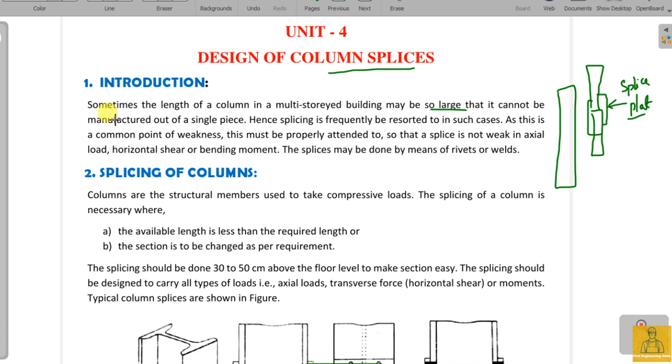The manner in which they are placed, or connecting the columns, is a little bit different compared to battens and lacing systems. Let me go into this. Let me show you a few figures here so you may get more clarity about this.

This is a column - this is the upper column, and this is the lower column, and this is nothing but the splice plate. This is how they connect, and this is the front view, this is the side view, and this is the isometric view of that section column.

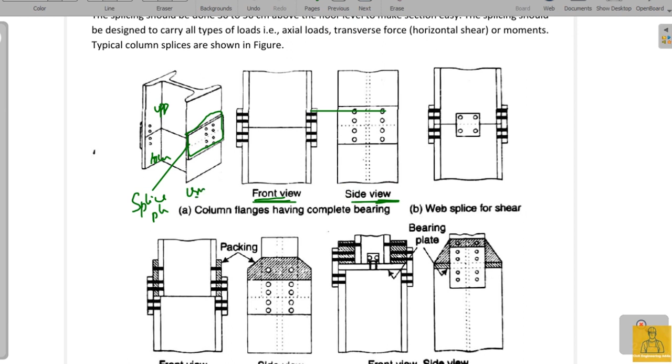Sometimes web splices to resist shear are also used. In the first case, the splice plates are attached to the flanges of the I section. But sometimes when there is shear, in order to resist the shear on the column, we use these web splices also. Web splices are meant to resist the transverse shear.

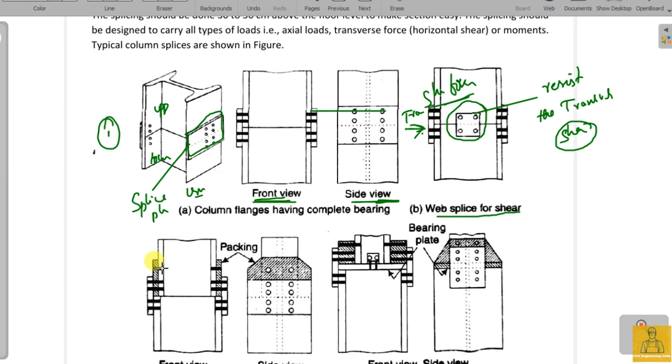In some situations, as you can see in figure C below, the upper column and lower column are of different dimensions. So what happens in that case? You may have to use a packing plate. This is a packing plate. The width of the bottom column is higher than the upper column, so what happens is you have to use some packing plates.

But in some situations, the upper column can be very much small. So what happens in that case? If you see in this fourth figure D, the upper column is actually resting on the web of the lower column, isn't it? The upper column is resting on the web of the lower column.

So in that case, what we do is we arrange a bearing plate - a simple plate of certain thickness, with width equal to the lower column's depth. If this is the depth of the column D, the width or length of the plate has to be D, so that the force coming through this upper smaller column onto the lower bigger column is transferred with the help of this bearing plate. If there is no bearing plate, the load is directly applied on the web of the lower column.

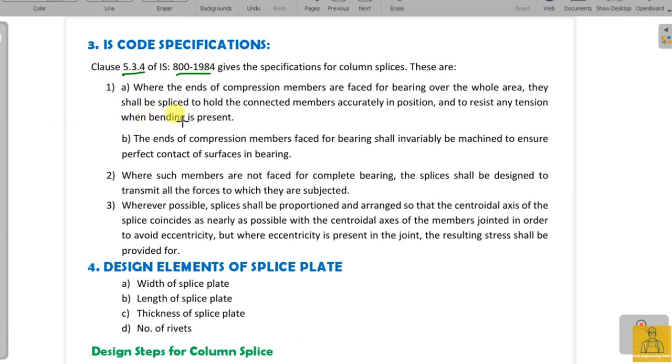I will make this as clear and simple as possible. There is a column here, a bottom column, and another column. Let me clear this and draw the figures a bit more clean. This is a column and there is another column. This is the length.

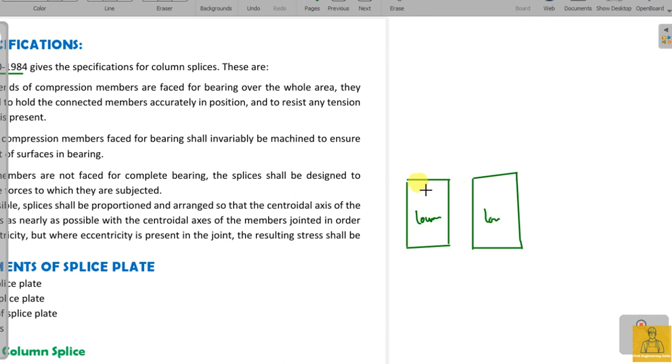So now you have to place another column on this column. These are the lower columns. But notice this: the surface of this column is exactly flat, while the surface of this other one is with undulations or inclined. So when you try to place a column like this, what happens is this complete cross section of the upper column will come in contact with the complete cross section of the bottom column. Because of this, the load coming from the upper column onto the lower column will be transferred completely by bearing only.

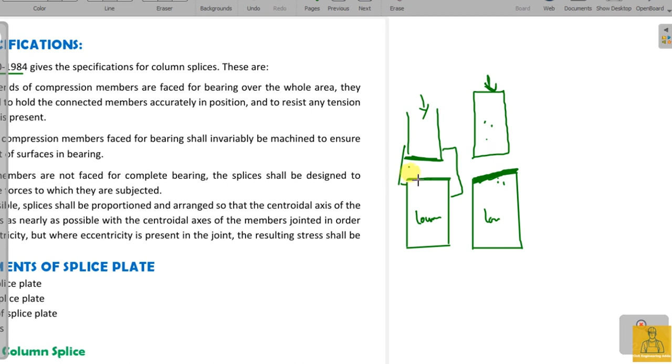But what happens if there is load acting on the same type of column, but the surface of the lower column is not proper? In that case, the load acting will behave as an eccentric load and will give rise to additional eccentric moments. Because of this, the load shared by these splice plates also changes. We will see a little bit in detail about those cases.

This is the design procedure of column splice. But it is better for us to go through the different cases first and discuss them before going into this. In the first case, for a uniform column cross section, the ends of the column are cut by ordinary method and not milled, meaning they are cut normally by ordinary methods. We are talking about steel columns.

So in that case, the load taken by each splice of a column is going to be half. For example, if there is a big column and you are trying to cut it with a knife or hacksaw blade, you cannot get a uniform or proper cut. It is not going to be perfect.

So if the column is cut by ordinary methods and not by the milled method, you have to consider that the splice plates are also taking the load. Whatever load is acting on this column, that same load is also acting on this splice—that is what we have to assume in this case. We put two splice plates on either side of the columns, so each plate will share half of the total load acting on it.

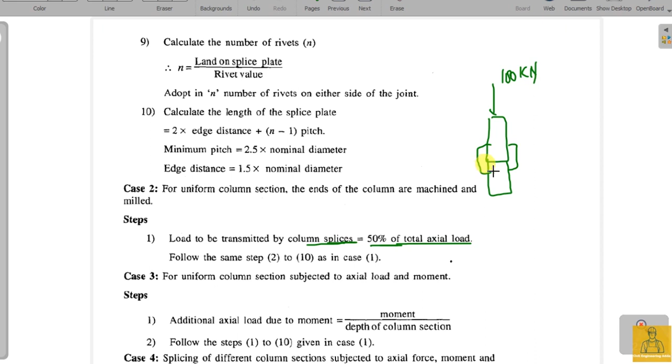But what happens if they are machine cut, using standard machinery to cut them perfectly? In that case, the load to be transferred by the column splices is taken as 50% of the total load. If a load of 100 kilonewton is acting on it, these splice plates are said to be transferring 50 kilonewton to the bottom column.

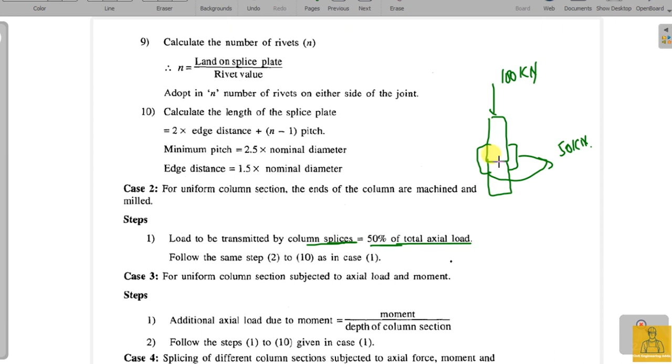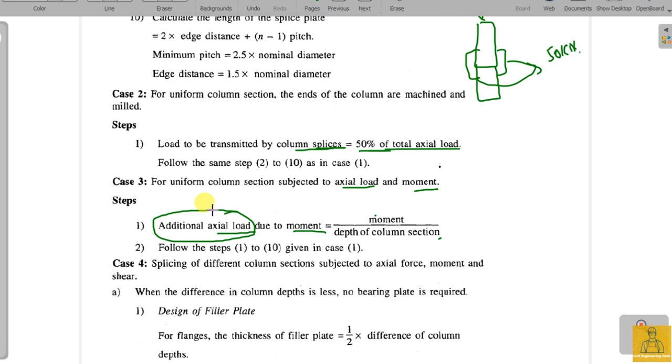But sometimes, as in case 3, for uniform cross section subjected to axial load and moment, when subjected to moment, you have to add additional axial load due to moment, that is moment divided by depth of the column section. This additional load due to moment should also be considered. And in the fourth case, that is splicing of different column sections subjected to axial force and likewise, bending moment and shear.

In such a case, we need to use a web splice. As I told you, in this case we have to use a web splice. So web splice comes into existence only when there is a shear force.

The procedure would be in this way. In all cases the procedure is the same, but the load shared by each splice plate is going to be different, so that is what you need to take into account. First step starts with load to be transferred with column splice. In the question, it will tell you how the cut of the column is done, whether it's a machine cut or not.

Based on that, you consider whether these column splices are taking the total axial load or only half of the axial load, as in case 2. Next, load taken by each splice: there are 2 splices, each sharing half of this load coming onto the splice.

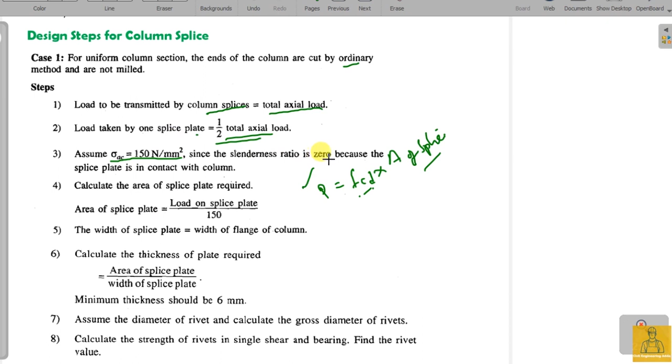Since the slenderness ratio is 0, because the splice plate is in contact with the column. The slenderness ratio of this column splice plate is taken to be 0 because there is no unsupported portion of this splice plate; the entire splice plate is in contact with the column with bolt or weld.

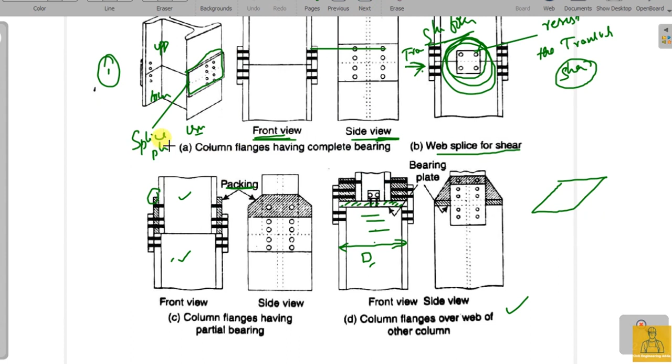See, this is the width B of this splice plate. As you can see, the width of this splice plate is also equal to the width of this flange, isn't it? So whatever column you have used, based on that you can just put that value here. So width of this splice plate is equal to width of the flange of the column.

So what happens to the other dimension T? You know what the area is from step 4, and area equals width into thickness, so you can find out the thickness. Thickness T equals A by W.

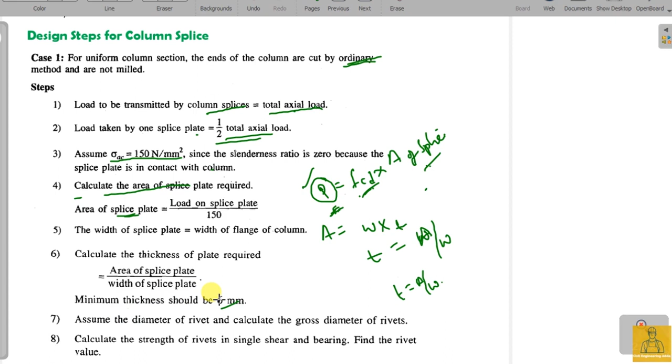Find out the thickness; the minimum thickness should be 6 mm. If you get less than 6, just take 6 mm. If you get above 6, that's no problem, but just round it off to the next highest value. Okay, next step, step number 7.

Assume the diameter of the rivet and calculate the gross diameter of the rivet or bolt. Rivet and bolt connections are similar, so assume the diameter of the rivet and calculate the gross diameter, because I want to connect this splice plate to the column with this bolt connection.

Now calculate the strength of the rivets or bolts in single shear and bearing and find the rivet value. The rivet value or bolt value is nothing but the strength of the bolt.

Okay, so the load taken by the splice plate is shared by the bolts. So based on the strength of each bolt, you can find out how many bolts are actually required.

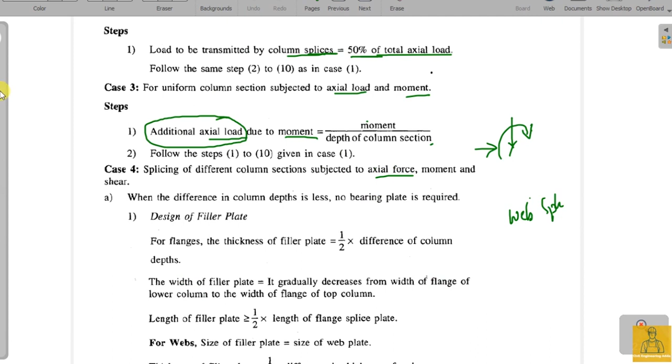So once you've found that out, the procedure comes to almost an end. So I calculated the number of bolts or rivets, and now find out the length of the splice plate. What is the length?

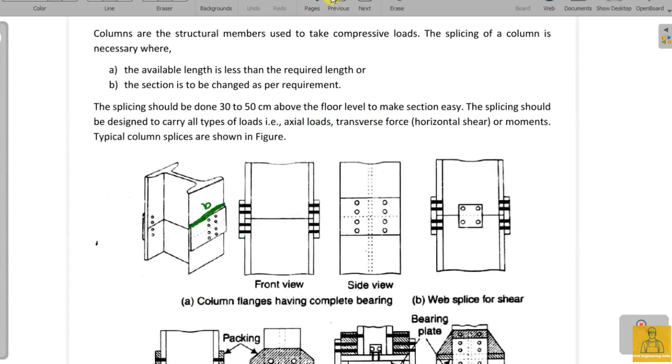This is the length of the splice plate. So now what is the length? It's 2 times edge distance plus n-1 times pitch. That would help you find it out, and it's not a difficult thing to do.

And you know, minimum edge distance is 1.5 times the nominal diameter of the bolt, and minimum pitch is 2.5 times the diameter.

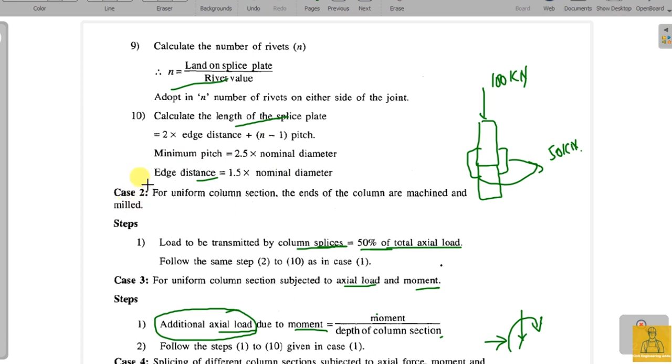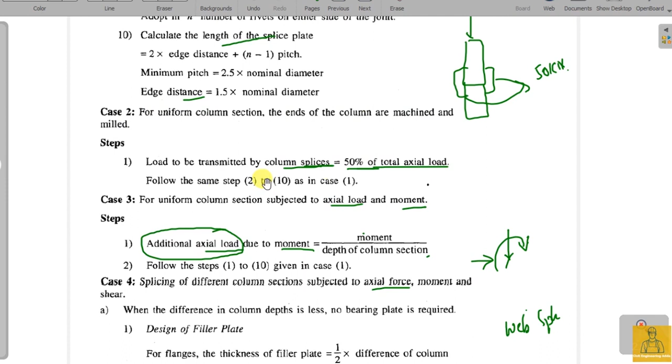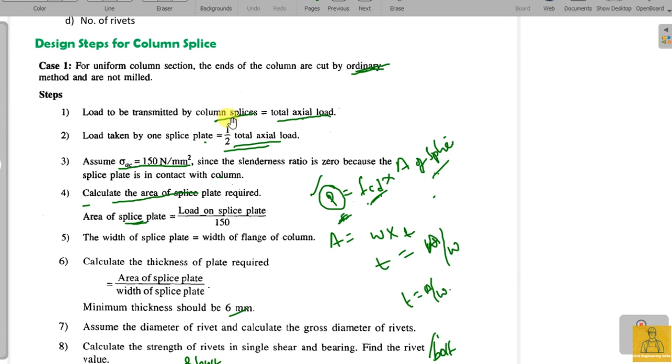So as I told you, in case 2, case 3 and case 4, the load taken by the splice plate changes. In case 2, as seen earlier, if they are cut by machine, the load taken by the column splice is 50%. But in case 1, since they are ordinary cut, the load transmitted by the column splice is the total axial load. We have to consider that.

But in case 4, as I told you earlier, the column is subjected to axial force, moment, and also shear. Therefore we have to go for the web splice also.

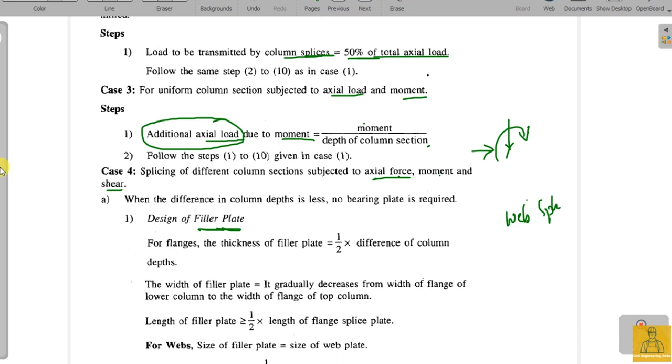And in case the top column and bottom column are of different shapes, you have to use filler plates based on the situation. And if the top column is very much smaller, then you have to go for bearing plates.

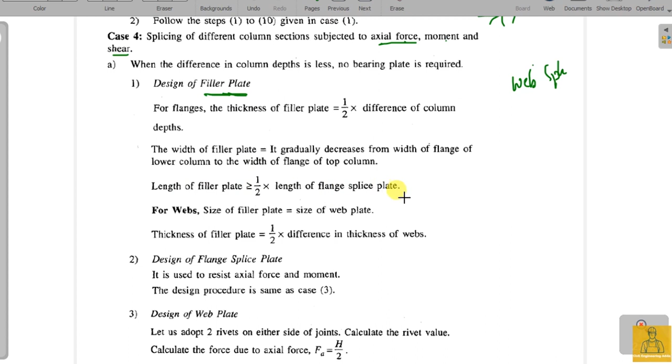These are certain codal provisions regarding the length of the filler plates. They have to be greater than or equal to half the length of the flange splice plates. We will see them in detail when we solve the problem.

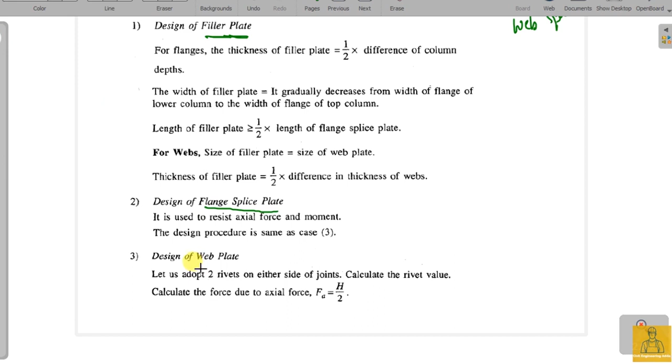And of course, the splice plates attached to the flange are called flange splice plates, and those attached to the web are called web splice plates.

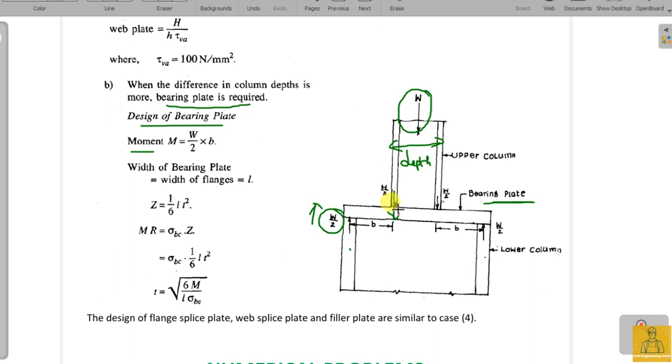So now what is the net moment going to be? W by 2 into the distance B. So the moment is W by 2 into B, and the width of the bearing plate is going to be the width of the flange, as we've seen earlier.

The Z of the bearing plate is going to be LT square by 6. This is something like D square by 6 - where D is used, T is placed, the formula is the same thing.

So you know that moment of resistance equals stress into Z. How did we get this equation? From the bending equation, M by I equals F by Y. This is how you get M equals F into I by Y, and F into Z. And of course here F is denoted as sigma BC, no problem with that.

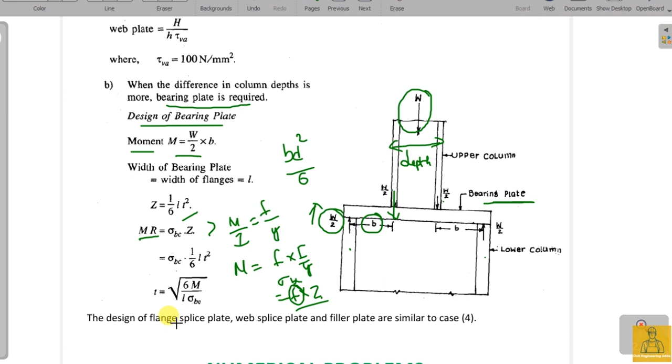And T finally will give you root over 6M by l sigma bc. So the design of the flange splice plate, web splice plate and filler plates is similar to case 4. So that's it.

Now we are going to solve a numerical problem in the next class. Thank you.